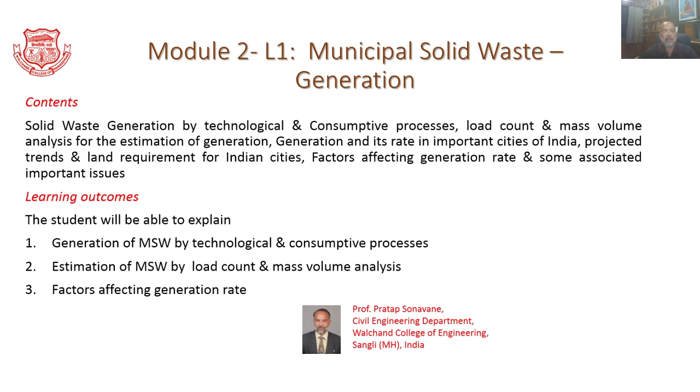As you learn the content, you will be able to explain generation of municipal solid waste by technological and consumptive processes, estimation of municipal solid waste by load count and mass volume analysis, and factors affecting generation rate.

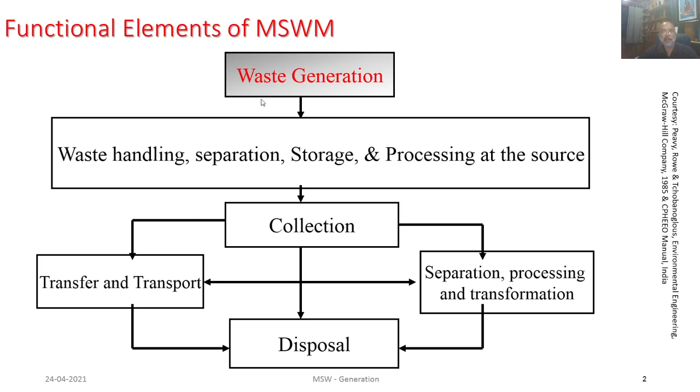In our last presentation, we got acquainted with the functional elements of municipal solid waste management. So, you know now what each of these particular blocks mean, and accordingly, as you see here, we wish to discuss about the first formal step associated with municipal solid waste management in the form of waste generation.

The generation of municipal solid waste is the inevitable outcome of all processes associated with any human activity. So, as they use any material, some of that particular material will be wasted and it will be produced in the form of solid waste. The amount of municipal solid waste produced by the residents for their basic activities associated with their living is expressed as mass per capita per unit time, and this is nothing but the generation rate.

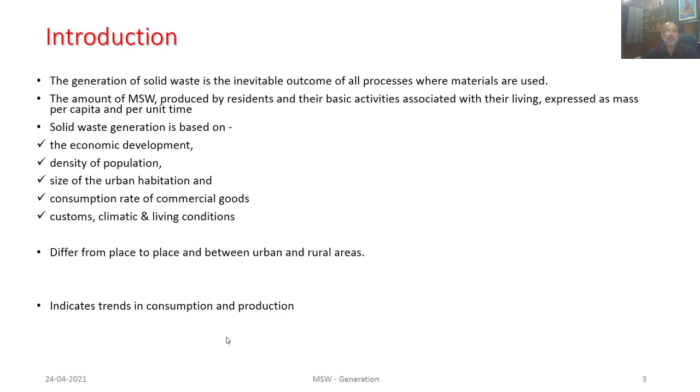In general, the generation is based on the economic development, density of the population, size of the urban habitat, consumption rate of the commercial goods, prevailing customs, climatic conditions, living conditions. These are some of the typical factors interfering with this particular solid waste generation. However, municipal solid waste generation differs from place to place and between urban as well as rural areas. Necessarily, it indicates the trend of consumption and production of solid waste in that particular region.

Hence, these solid waste generation rates estimate the amount of the waste created by the residences and associated activities over a certain amount of time. So, per person, if we consider, it can be kg per capita per day. It can also be expressed for the entire community in the form of total waste generated by that particular community over certain time. So say for example that can be considered as metric ton per day, metric ton per year, etc.

We wish to have this solid waste generation data in a very accurate manner, because this particular data is coupled with the quantity as well as density. As we know, here this particular quantity will be expressed in terms of volume, in terms of say mass. This particular density will be expressed as kg per cubic meter, so it is nothing but the mass per cubic meter. So as we consider this, it is important in assessing the payload capacity of the collection equipment.

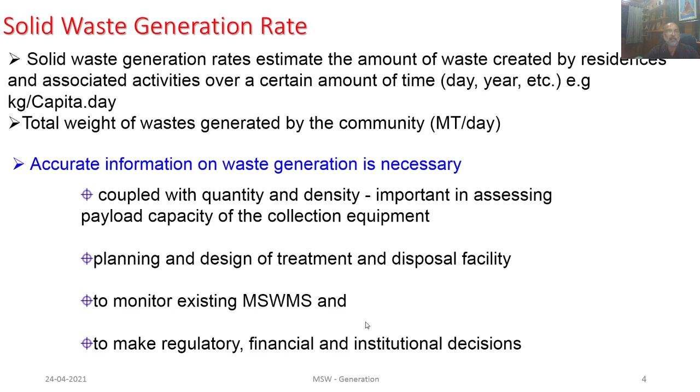As we develop the infrastructure associated with this particular solid waste management, we have to monitor prevailing waste management systems, and we have to apply the changes, corrections as and where required in order to have its efficient working. Hence, to monitor the existing municipal solid waste management system, the generation data is very important. Also, the waste generation process itself is very dynamic. Hence, in order to make regulatory, financial as well as institutional decisions, the data of this particular generation rate is very much important.

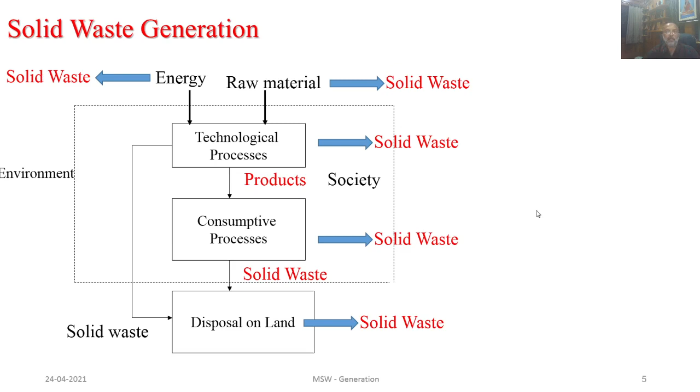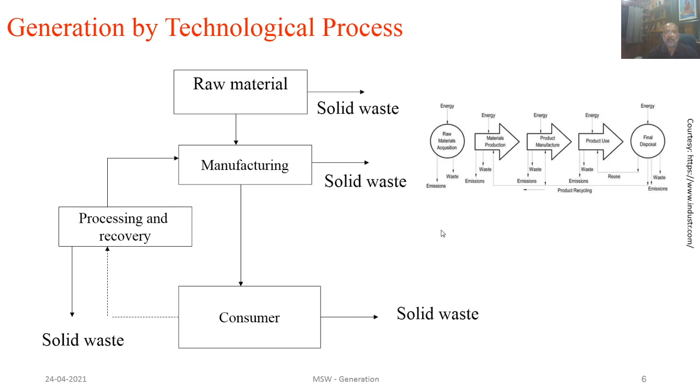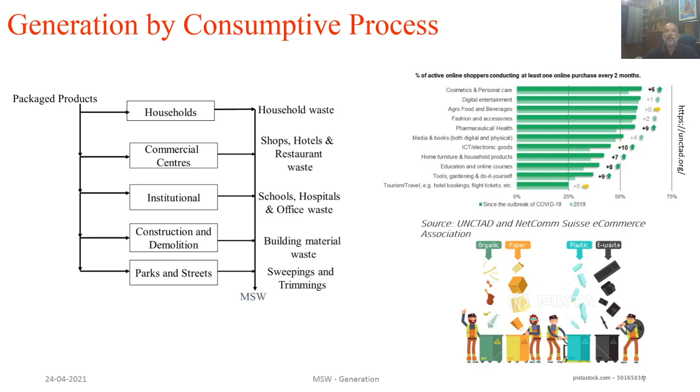Also, there will be change in fashion, change in availability, some new trends, so to say. Even as we consider the recent pandemic situation, most people are working from their home. And since the outbreak of COVID-19, the usage of cosmetics, personal care, pharmaceuticals, e-gadgets, and even education material associated with online courses is also increasing. So the generative processes through consumption is also one of the important studies as far as municipal solid waste management is concerned.

This information of generation we have to quantify. As you saw on the earlier slides, it is expressed as kg per person per day. The total waste generation has to be the sum of waste deposited at certain processing facilities, waste that finds access to unauthorized places, waste directly at landfill sites or segregated through processes like transfer stations or separation, as well as waste which is not collected at all. So as each of these aspects varies, it is very difficult to arrive at an exact figure of waste generation in the city.

In our last presentations, while discussing physical characterization, we discussed the methods that we can follow to decide the characterization. In that, we discussed the material flow approach and site-specific studies. Please note that these approaches do not deal with generation studies; they are simply meant for understanding characterization. But they can be clubbed with two more approaches, termed load count analysis and mass volume analysis.

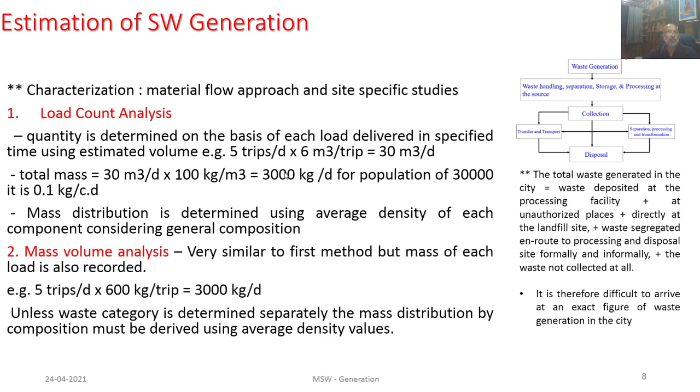As this particular generation is the first element of formal municipal solid waste management, it is essential to understand the typical trends that are observed for various regions.

Here the first table is depicting certain information associated with the per capita quantity generation for Indian cities. This particular study is giving the data based on the populations. So for the various classification of the cities based on the population, less than 0.1 million, 0.1 to 0.5 million, and accordingly here the waste generation rate is seen.

Also, as you consider the data of 2004-2005 for selected metro cities such as Kolkata, Chennai, Delhi and Mumbai, here the waste generation is observed to be 0.58, 0.62, 0.57, 0.45 kg per capita per day. This is associated with a certain study.

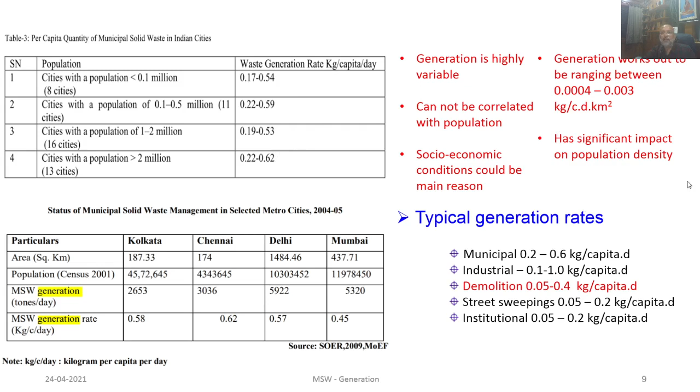Also, here the generation works out to be ranging between 0.0004 to 0.003 kg per capita per day per kilometer square. So as we consider these particular data, based on these we can draw one of the inferences. Hence, we can say that the generation has significant impact as far as the population density is concerned.

Here, this particular study is depicting the waste generation over India for the top 10 cities as far as waste generation is concerned. Here also it can be seen that this particular waste generation is varying between 0.42 to 0.71 kg per person per day. Place wise, the variation can be easily seen here.

The way we considered over the last slide, the population density is one of the major factors we thought of as far as this particular waste generation is concerned. So in the similar manner, the effect is reflected through this particular graph. There is the largest waste generation as far as Chennai is concerned, followed by Delhi and Mumbai.

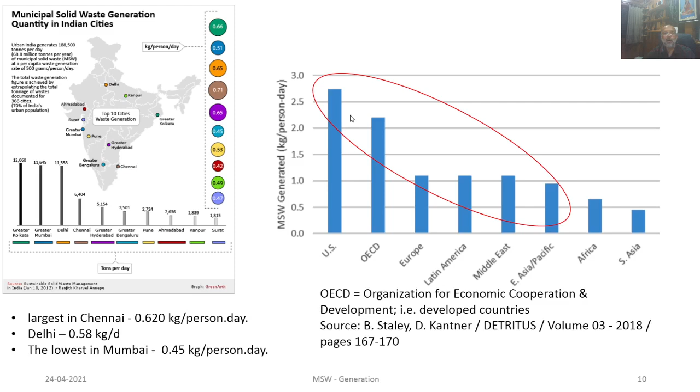So as we consider US, OECD, Europe, Latin America, Middle East and such regions based on the studies, as far as our Indian conditions are concerned, the average waste generation is 0.5 kg per person per day, which is quite low as compared to these other countries.

As we have the waste trends collected over the various years, it can be seen that this particular waste generated is continuously increasing, and the increase is observed to be 5 million tonnes per year. So this is what is depicted with the business as usual scenario.

In relation, as we consider the cumulative land requirement for the disposal of this particular municipal solid waste, in 2021 it is expected to be 400 square kilometers, as compared to the 1997, 2001, 2011 generations. As we consider the trend, there is an increase in demand of 30 square kilometers per year.

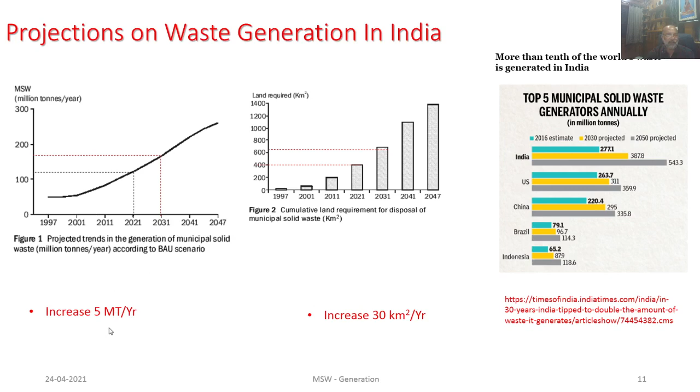Based on the data that is observed, with the per capita waste generation increasing by 1.3% per annum, the yearly increase in the waste generation is around 5%. So, as we thought of the Indian conditions and the associated increase of 5 million tonnes per year, as far as Maharashtra state is concerned, this increase is projected as 5%.

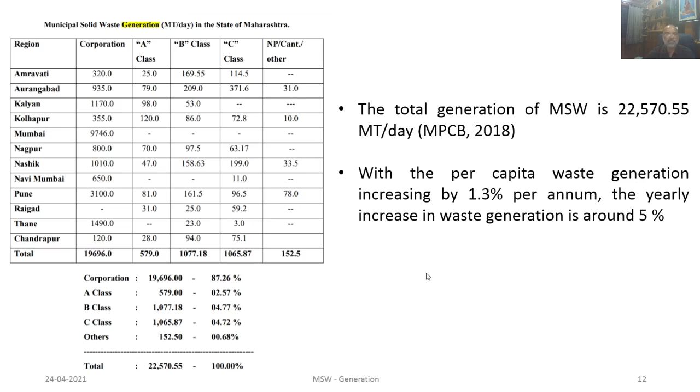We can think of various factors that are affecting this particular solid waste generation rate. It will be varying with the geographical location, season of the year, the collection frequency, whether it is daily, twice a week, weekly, and accordingly. Also, on-site processing, the characteristics of the populace, the extent of source reduction, salvaging and recycling.

So if at the source itself the waste generation is reduced through these recycling as well as salvaging operations, and if it goes with the public attitude, the waste generation will be considerably reduced. It will also depend on the change in habit as well as lifestyle of the people. So as we think of rich people, the waste generation will be higher as compared to the waste generated by poor people.

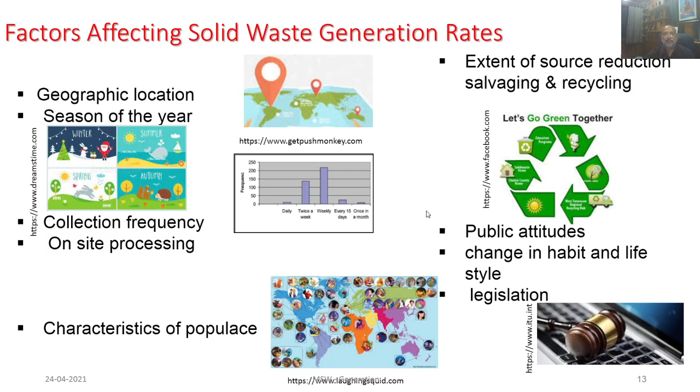In light of all the discussion that we had up till now, we can consider some of the important issues as generalized as far as the generation aspect is concerned. Here, waste reaching from various unidentified sources at a common place could be individual habitats, unauthorized structures, small shops, construction activities, and such establishments. It cannot be exactly recognized as far as a particular source is concerned. And for an urban local body, receiving the variety of such components of solid waste, collecting them, treating them is a very difficult task.

By and large, though various awareness programs are designed, community awareness program activities are conducted through certain NGOs, people do not care about the waste generation. As well, many do not take particular efforts as far as their disposal is concerned. This being the first step, people's attitude is one of the very important aspects where we need to work in order to reduce the generation of that particular waste.

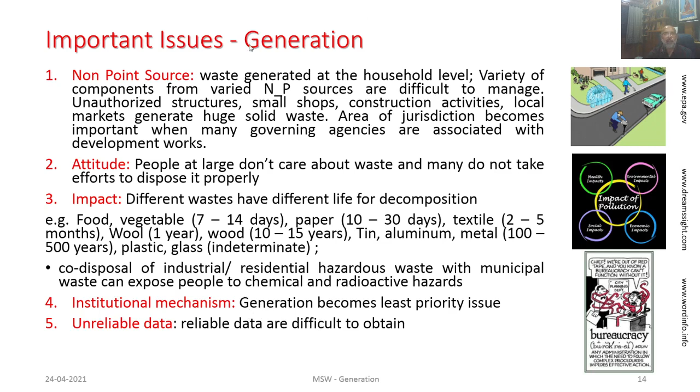And because of these factors, see, with collection of the information from non-point sources, with the negative attitude of the people, with the impacts yet to be identified as well as experienced, and in the absence of appropriate institutional mechanism, the data generated may not be reliable. And if the data is not that reliable, we won't be able to decide the proper policy for any of the subsequent elements that we wish to discuss. Hence, these issues are to be studied in depth as far as the generation aspect is concerned.

So, thanks for your attention. I hope the points that we discussed are clear to you. In the coming presentation, we will discuss on-site handling and storage.